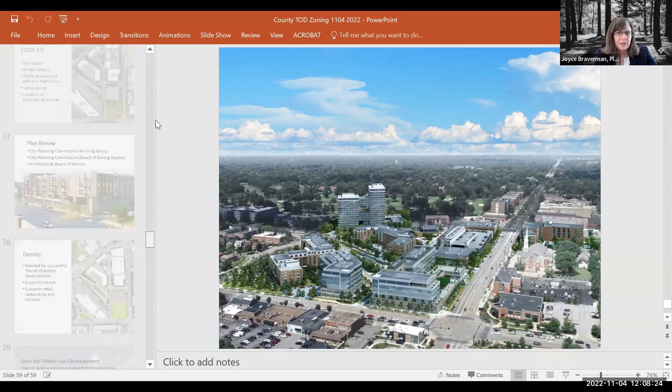Thank you, Patrick. I do want to introduce our team, I'm going to share my screen real quick. We have Luke Palmisano from Max Collaborative, Dan Feinstein, Senior Planner and Zoning Administrator, Mayor Weiss, I believe, is on the line, and Anna Mates, our planner. And so let me get this slideshow started.

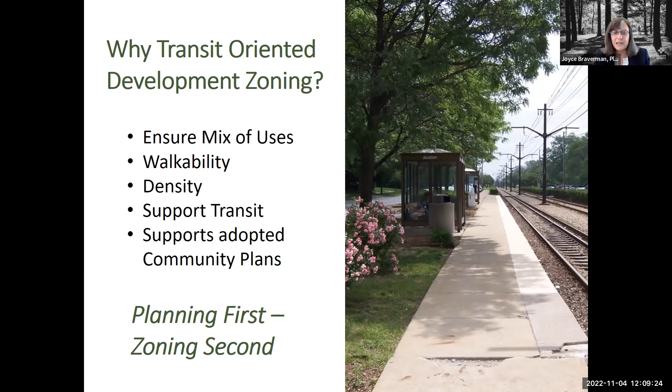And what we always say is we do the planning first, and then we do the zoning to support that planning. So we're going to look at the Van Aken district, which is at the corner of Warrensville and Chagrin, as a case study.

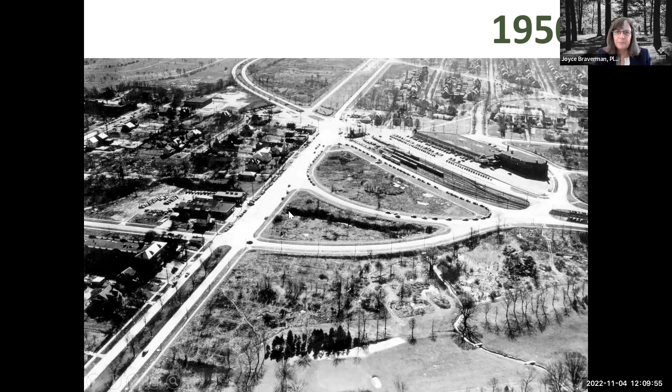In 1950, this area already had transit. You can see in about the middle of the slide, right about here, this was the RTA end of the line, and it was a rail station, a rail yard. One shopping center was built, a strip shopping center, and the other one had not been built yet.

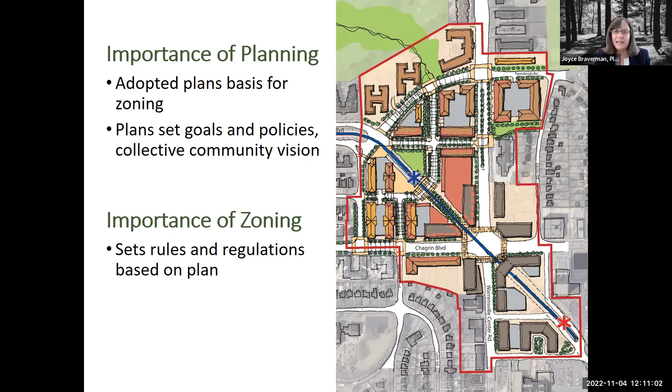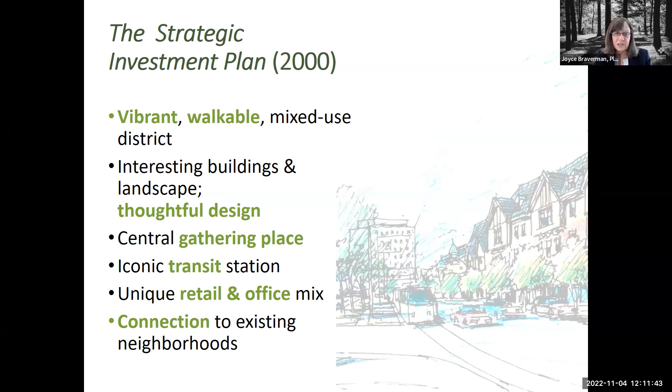So our first vision, our first modern day vision, because there were visions for this area since 1960 of how to improve it, in 2000 we did a strategic investment plan, and that was a citywide plan. But for the Van Aken district, it did call for a vision of a walkable mixed-use district, something with a central gathering place. It did call for an iconic transit station and connection to existing neighborhoods. We had great graphics, and you can see, on the right, a sketch, and this got the community really interested.

We did not go back to Van Aken. We actually worked at Shakertown Center near City Hall for the next few years. And we got back to the Van Aken district in 2008.

Our plan was called a transit-oriented development plan. This plan was important because it called for reconfiguring the intersection. Many of you know Van Aken, Warrensville, Northfield. It used to be a terrible intersection in terms of traffic. So we closed Van Aken Boulevard in the middle of the site. We relocated Northfield to the south, and that allowed a 4-way intersection.

This plan also showed 2 rapid stations. You can see them here on the slide in the red circles. The proposed intermodal station was to extend the rapid through the intersection to an intermodal station, and the current rapid station was proposed also to be a rapid station.

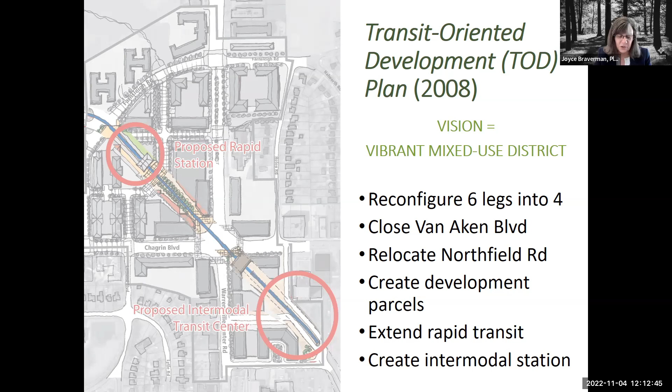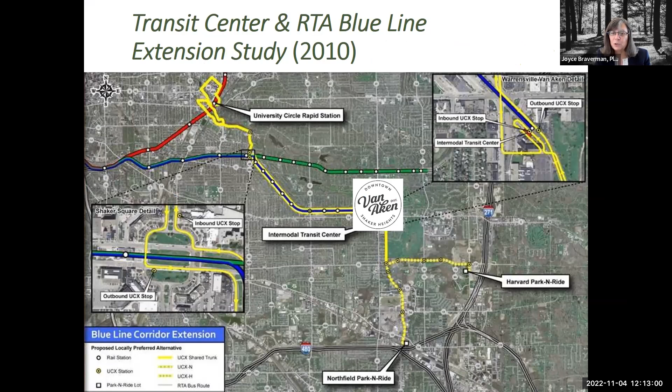In 2010, we supported RTA as they did a transit center and RTA Blue Line study. We did the transit center together, and RTA did the Blue Line study, and that was looking at extending the Blue Line out to 480 and 271.

We also did an economic development plan in 2010, looking at, if we had development, how do we brand the city as a place to live and work instead of just live? And how do we diversify the tax base? So we looked at likely market segments.

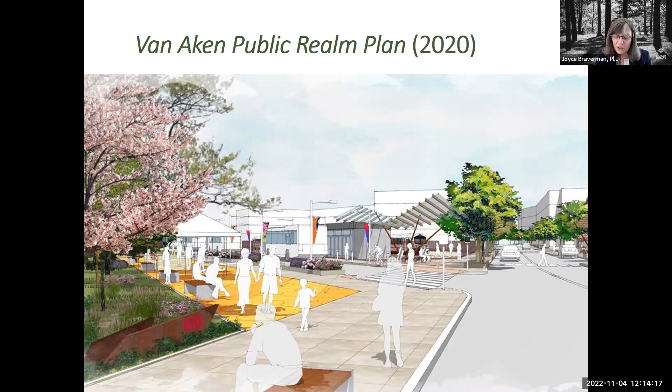During the pandemic lockdown, we did a Van Aken public realm vision study. This was in reaction to and in working with RTA, who were planning and are still planning a track improvement and a new comfort station at the end of the line. We wanted to work on the public realm to help connect the transit station better to the development areas.

So I mentioned the intersection. We have 45,000 cars a day, with 6 legs coming in. It was confusing and congested and unsafe, with many accidents—first in our city, number 11 in the county. We called this the 2-latte intersection. There was a Starbucks that used to be in the middle, and you could wait at any of these lights for 3 minutes before you could go, and you could not make left turns. We used to joke that people could jump out of their car, get a latte, and come back, and the light would not have changed yet.

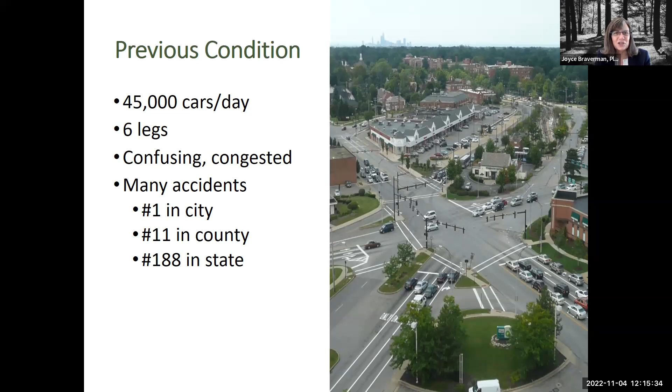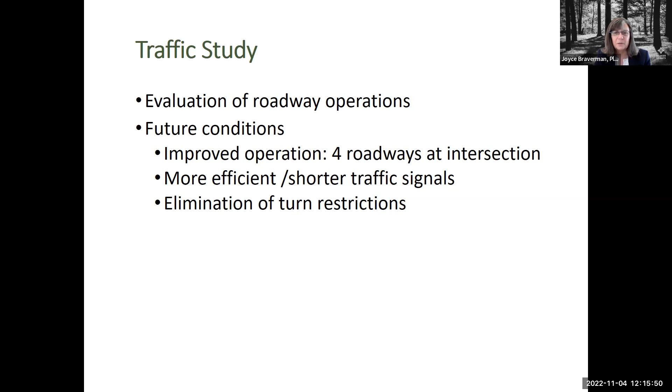So we did a traffic study, or maybe two, to evaluate the roadway operations, and we looked at the future conditions of improved operations by taking this to a 4-way intersection. That is what we did. This was a huge city investment in infrastructure to support future TOD development. We spent a little under $19 million, but raised $19 million for this from 7 funding sources, because it is often the city that needs to step in and do infrastructure improvements prior to a development.

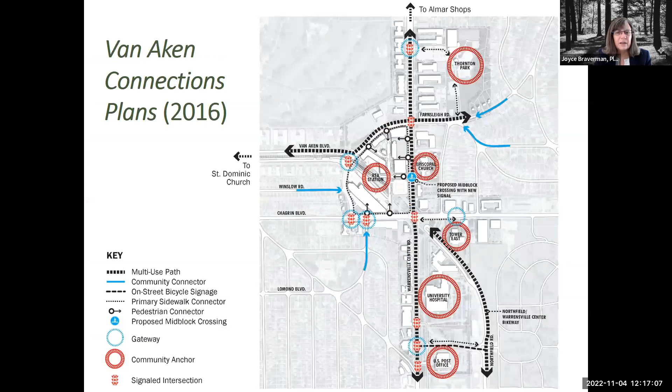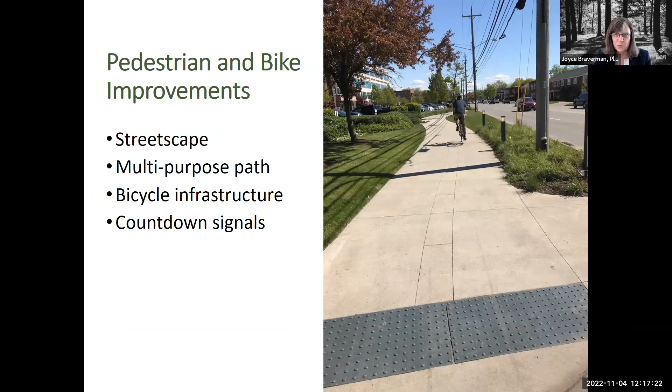The connections plan did result in streetscape and multi-purpose path improvements and other bicycle and pedestrian infrastructure improvements. This is a photo of the Warrensville multi-purpose path, which is for walking and cycling.

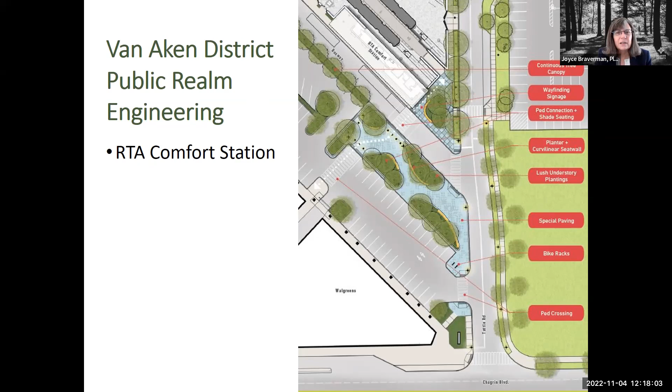We then followed up on the Van Aken district public realm plan with an engineering plan, which we're doing right now. This will be a $1.8 million investment in a plaza right across from the RTA comfort station. The new comfort station is near the top of the slide, and the blue areas are public plazas that the city is going to install in early 2024 to improve connectivity to the district, north and south of here, and to improve the waiting environment for RTA riders. This is a view of the RTA comfort station, which RTA is now engineering, and we hope it is constructed in 2024.

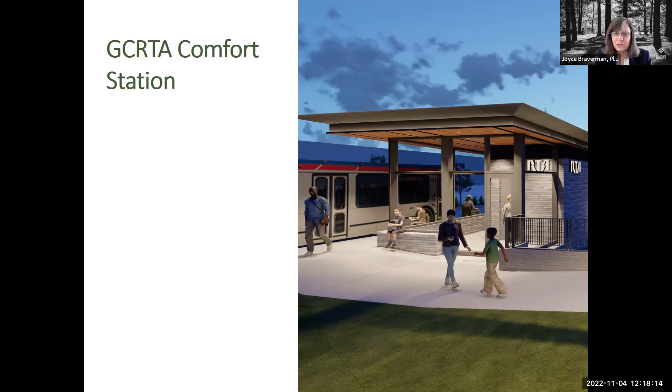So the zoning code supports transit-oriented development. In Shaker, the way we mostly do this is through the commercial mixed-use district. The commercial mixed-use district has your usual type of regulations: height, setback, parking, permitted uses, conditional uses, and site plan review. But the purpose statement, which I'm going to read a little bit of, is really important.

The purpose statement sets the tone for the district and also directs anyone looking at the code, or the zoning administrator, how to interpret the code to support TOD.

So the purpose of our district says to encourage a compact mix of uses, reflect the human scale, and emphasize pedestrian orientation, take advantage of the convenience provided by multimodal transportation options, and the vitality that mixed uses can bring to the community. And then further, it says it's to create development around key transit stops and create dense walkable

mixed use centers, employment opportunities, improve the pedestrian environment, take advantage of the benefits of transit, including the value that transit services add to adjacent and surrounding real estate, and increase the physical and cultural prominence of transit in the community. So our code is very clear why we're doing this, and it really helps support the regulations.

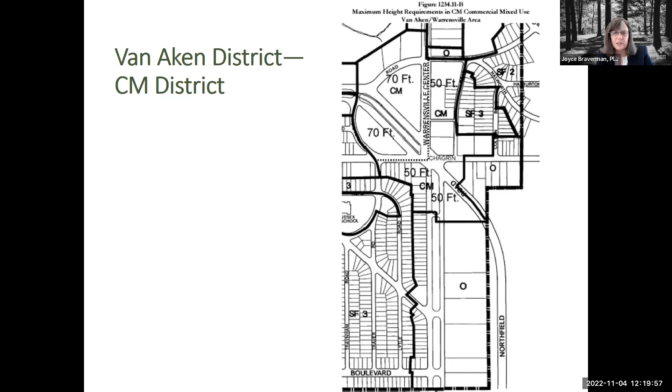We have two commercial mixed use zone districts in Shaker. One is the Van Aken district here. This happens to be the height map. You can see it's CM in the middle, and it is surrounded by office and also single family. The Chagrin-Lee district is the other district that we have that is also zoned commercial mixed use.

So the CM district's permitted uses include retail, housing, restaurant, and service uses. It does not allow things like automotive or drive-throughs by right. A conditional use is a drive-through, and we do have one drive-through in the Van Aken district, that's a fast food restaurant - a Wendy's.

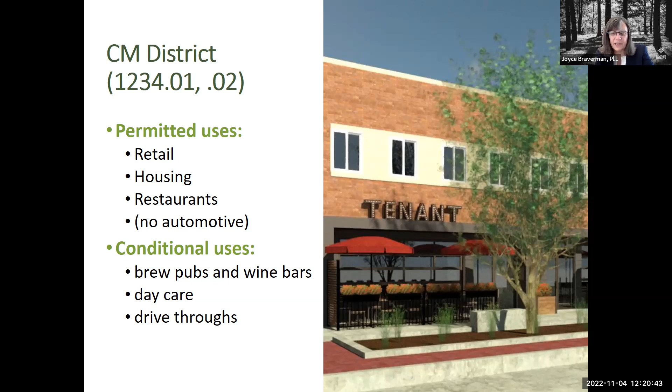And we have a pickup window that's coming in for a Chipotle. But other conditional uses are brew pubs and wine bars, as well as daycare facilities. And this is a rendering of a building south of the Van Aken main district that is being renovated for both a brew pub and a restaurant.

In terms of parking, we do have a 60% reduction in parking requirements for transit-oriented development. We also have a maximum of parking, so you cannot build more than 100% of your required parking. In this case, we have been giving 60% reductions for anything in the greater Van Aken district. We've also included parking for bicycles as a requirement.

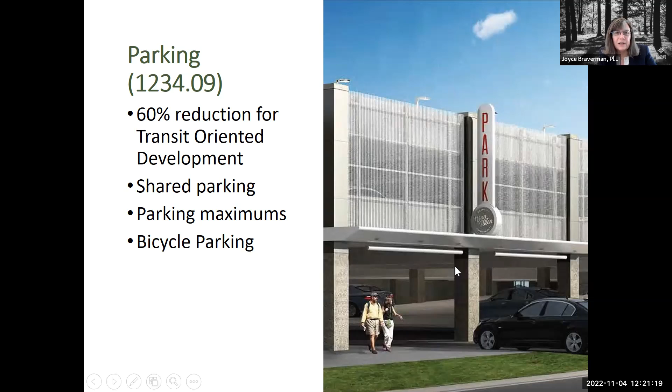In terms of height, we have a 70-foot maximum height in the Van Aken districts and a minimum of 2 stories. This code is for new development as well as existing areas. So we've had, say, a Rite Aid come in, and they were one of the first buildings built under this new district.

And it has what we call the appearance of 2 stories - it's a very tall 1 story that looks like 2 stories, because you have to understand that in a built up area, your code, you can't just do it for new development. You have to figure out how existing development and other infill development work with it.

Setback, we have a minimum 5-foot setback and a maximum 10-foot, so we are forcing the buildings at the street. This is an aerial of the Van Aken district and Tuttle Road and a mixed use building that you can see is very close to the street.

We have had to give a number of variances, small variances to that setback, because for a tall building, sometimes 10 feet is just really too close to the street.

We also have large lot development, and this is where I was saying, infill small lots versus a large lot. So we have a special section that deals with mixed uses being required in large lot developments. It requires active first floor uses, including that active first floor uses require clear windows facing the street. We also require that 50% of the first floor building frontage be active.

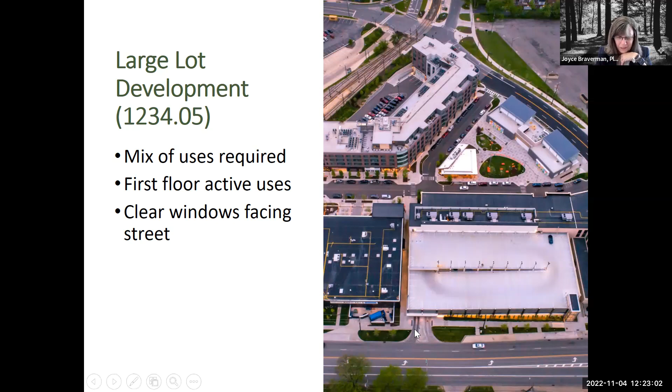Dad, can you take this slide for me?

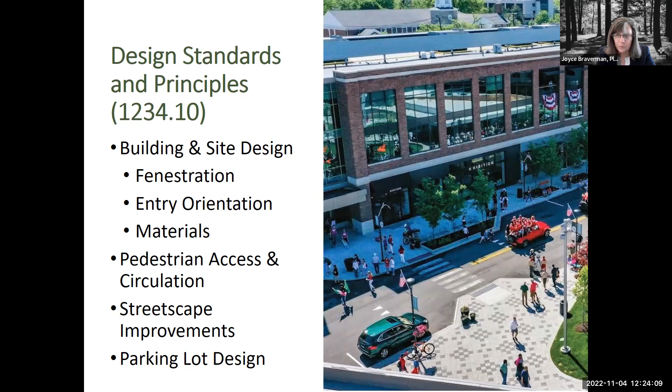We also updated these standards in 2013 to get ready for the private development, and we added bike parking standards, sustainability guidelines, and the requirement that parking structures be aligned with active uses facing the street.

We also have site plan review standards, and this is for our entire code for any new development or any new building. This is where we look at the site layout and the street pattern.

In this case, it was very helpful to have this type of review because what's labeled as Meade Road here, but is really called Tuttle now, originally was not connecting both main streets. Originally, it started at Farnsleigh but ended in the middle of the site. Through our site plan review discussions, it was decided that it would be best to connect to Chagrin.

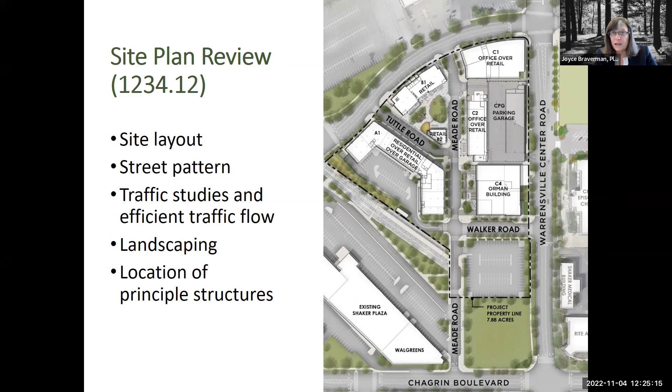We also require traffic studies as part of this, and that is helpful to map the traffic and see if there's any traffic improvements needed. We also look at landscaping through this section.

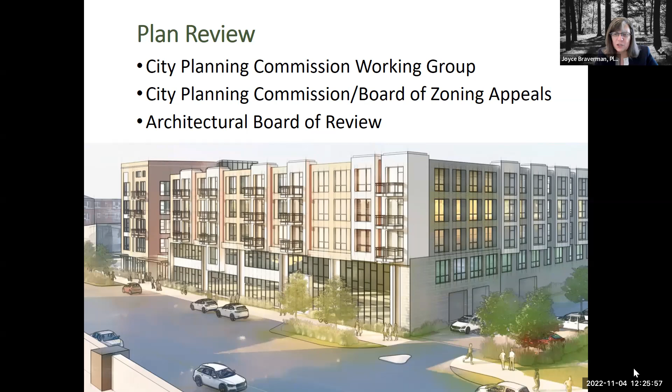In this case, we created a city planning commission working group because the Van Aken district was a large project. The working group spent time looking at all the details, the nitty gritty, having those conversations, and they made recommendations to the planning commission. So by the time it got to planning commission, a lot of the details were already worked out.

Density is also something that our zoning code requires, and this is what density is needed for a successful TOD, mostly because it supports transit, it supports your retail, your restaurants, services, as well as office uses.

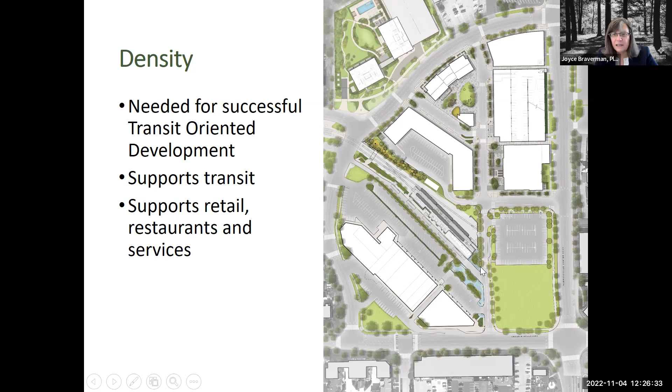This plan shows the main district in the middle. We'll talk a little bit about phase 2, which is under construction now, to the top, another private development at the right of the slide, and future developments to the south. But density is an important topic.

So mixed use development—I talked about planning, I talked about zoning. There's also other things that you need in Cleveland to get mixed use development going.

Public-private partnerships, the use of tax incentives, be it TIF or negotiated tax abatement, incentives such as loans and forgivable grants to businesses.

Many communities use design guidelines, and when we hear from Cleveland Heights in a couple of weeks, you'll hear about how they've done that, as well as joint meetings between your boards.

There are other efforts that we've done to help enhance this—I mentioned infrastructure investment, $19 million in the intersection. We've also done a lot of sewer work, spending a little over $1 million on sewers in this district.

First, for phase 1, we tied a sewer just east of the property into the sewer district deep tunnel so that there would be room in our old sewers for all the water. We've also replaced a culvert under phase 2, again to make way for the development.

The city has done streetscape work, bike facilities, public art. We have a piece of public art being designed right now, $75,000, for the new public realm that I showed you. And then other continuous improvements: the Van Aken bikeway plan that we're underway on now, which will be a bikeway from the Van Aken district to Lee Road to connect major bike facilities, improving the public realm, and of course working with RTA, our partner, on the comfort station.

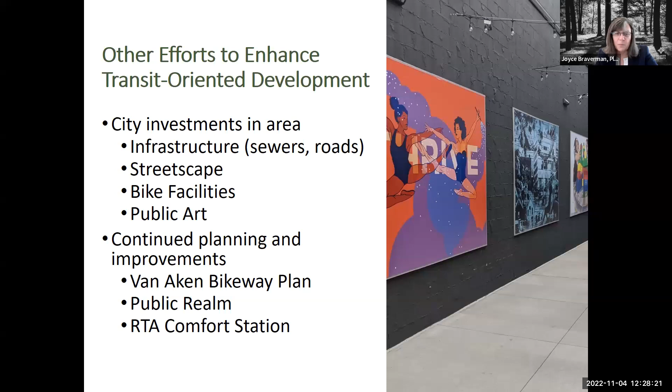There are other policy considerations—I mentioned TIF, tax abatement, and incentives—also working with our regional partners to encourage investment. This has been a very important part of getting this done, working with RTA, the county, NOACA, and the state.

We also are successful because of political will and political support. This can't be done unless your mayor or mayors—in this case, 4 mayors, I think—worked on this project, and council supported this, both with their political will as well as their money.

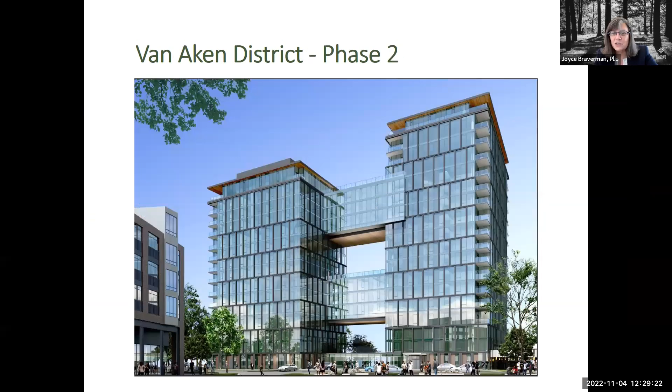And we have resident support, built through inviting the residents in at the planning level to tell us what they think and give us their ideas, and then listening to what the residents want. And that's very important. So this has resulted in Van Aken District Phase 1, the mixed use development, and Phase 2, which is an apartment building.

And I am going to turn it over to Luke Palmisano, who'll tell you more about the private development.

Thanks, Joyce. Hi everyone. I'm going to leave my video off because my internet connection isn't great right now. As Joyce mentioned, my name is Luke Palmisano. I was the chief developer of the Van Aken District for the Ratner family. At the time, my position was president of RMS Real Estate.

Luke, you're breaking up a little bit. Can you hear me better now? Yeah, now I can hear you.

Forest City was a nearly 100-year-old company when it was sold in 2018, founded by the Ratners, many of whom live in Shaker Heights. So this project was in their backyard. And the old strip center was developed by Albert Ratner in the 50s. It was one of his first real estate projects. So a lot of history.

The city, at the time, started working on the reorientation of this intersection, the Chagrin-Warrensville intersection, and demonstrating their commitment to having a great commercial place in the city of Shaker Heights, which is 95% residential homes. It encouraged us to spend a lot more time working on the possibilities for the land.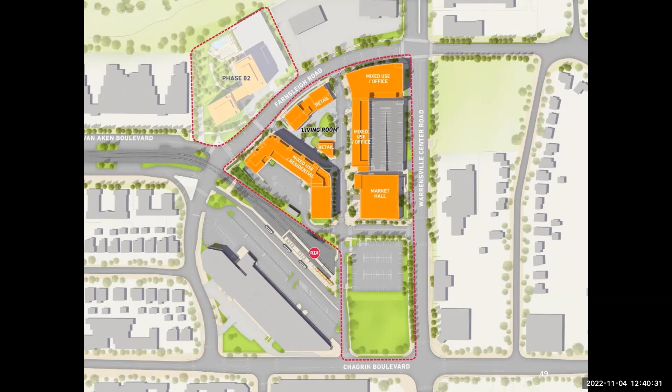One of the heart and soul of the project is the market hall. This was a way for us to bring in best of local tenants because we did all of the common area build outs.

We created the bathrooms, the stalls. All the tenant has to do is build their infrastructure within their 100 to 400 square foot stall and pay us a percentage of sales. It's a simple 2-page lease.

We wanted it to be a place where you can gather throughout the day. It's not a place where you go eat lunch and leave. You can, but it's not like a food hall in other markets where they're dense and you don't have any places to sit.

This is the community's gathering spot, and that's certainly panned out. It looks like this only a few times a year. Most of the year, it's more casual. This was for an event. But you have people having coffee meetings or working on their laptop, having lunch. They're there with their families. Every time you go there, you end up running into someone you know, which is what this district is all about.

From the next slide here, the public space was very important. We spent a lot of time focusing on the size of the park. We wanted it to be big enough to do events and have large gatherings, but also small enough that it didn't feel empty when it was just a normal Tuesday afternoon.

So I think if you're planning public space into a project, it's important to get the size right. It's important to get, and this is part of the zoning that Joyce talked about, the scale of the streets and the sidewalks right to make it feel comfortable for the pedestrians walking through the project. On-street parking helps a lot in that pedestrian atmosphere.

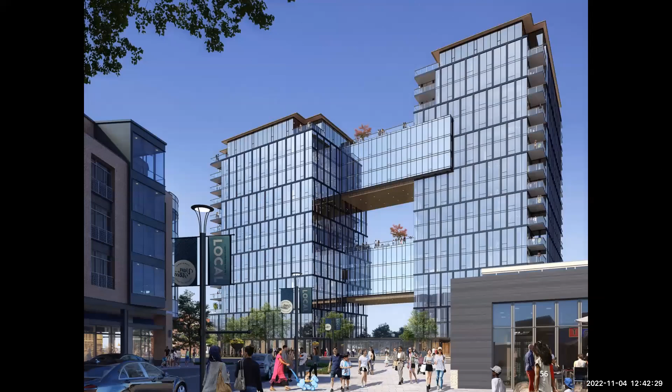So we completed phase 1 in 2018 and into 2019. We started to stabilize towards the end of 2019, and then COVID hit. We have restabilized last year and into this year, and the district's in a great place.

The apartments are in incredibly high demand. Usually we like to keep our apartment buildings at around 95% occupancy. We can't do that. We're always at 98, 99% occupancy. And that's because people want to live here because of the amenity, which is the district itself.

We don't have a lot of amenities in this phase 1 apartment building, but you can walk out your door and go to a great restaurant, hop on the train, head downtown, be there in 26 minutes. It's a great place to walk your dog or just be with your family.

That has encouraged us to build phase 2, which is an 18 and 14-story tower with bridges that connect the two. Those bridges are not hallways, they're actual units that have views of both the golf course and the city and the lake and the Van Aken district, so you can see on both sides.

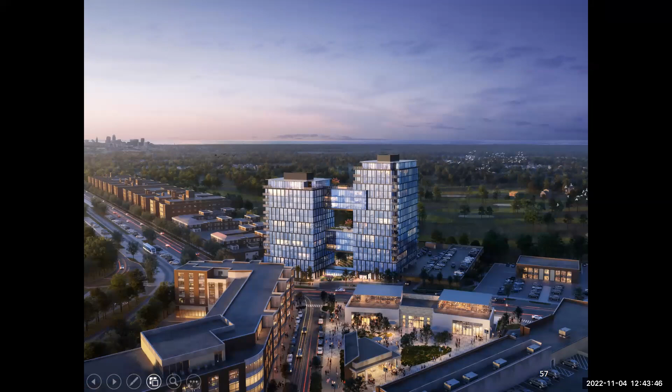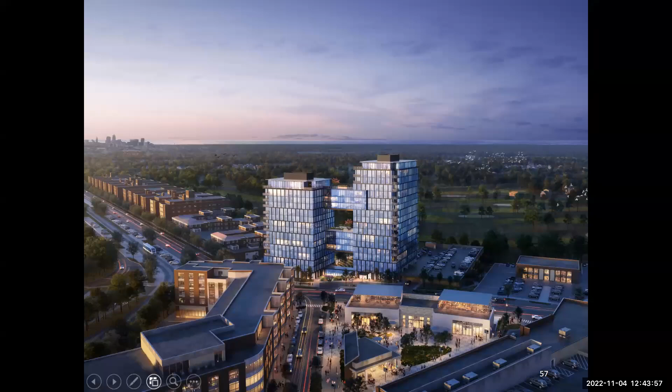It's a concrete structure with 227 units. These will be some of the nicest apartments in Northeast Ohio. And we're very bullish about it because of how well phase one is doing. If we had these units today, I'm sure they'd be leased up very quickly.

This will deliver in about 22 months. It's under construction right now. Again, it's the result of what the city and RMS intended in the first phase, to encourage future phase development. This is because of Van Aken phase one and the place that we've created. There are other developers now doing work in the district, which is what we wanted, what we encouraged.

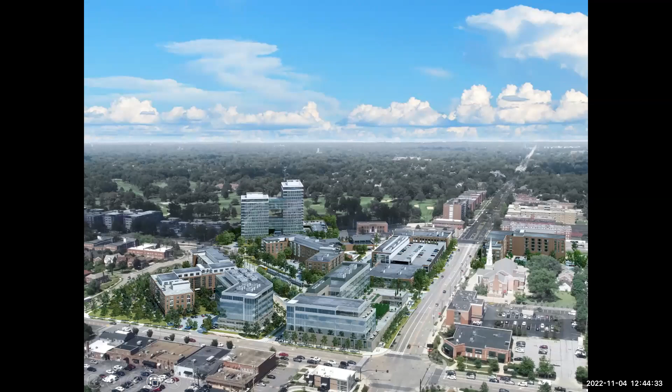And there's the opportunity for much more south of the market hall. There's a 2-acre parcel, which we're focusing on office development, again, to facilitate the mixture of uses, the mixture of people throughout the district at different times of the day. Then Shaker Plaza could get redeveloped at some point as well. In the middle of all that, you could see the train, along with the bus transfers there.